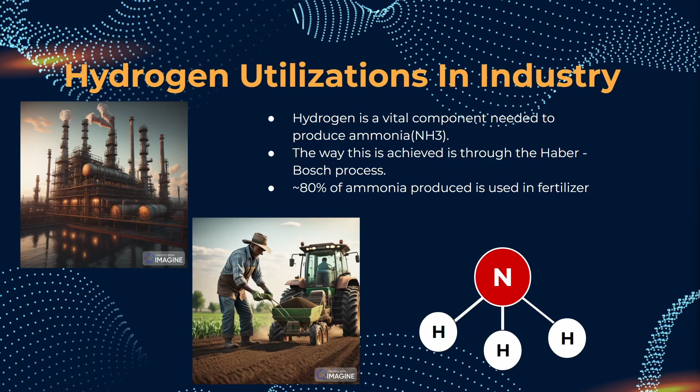While hydrogen as a potential fuel has been known since about the 19th century, in recent years it has resurged in popularity as a potential fuel source of the future. But why use hydrogen as fuel? There's been a move to minimize global carbon emissions, and hydrogen has shown a lot of potential as a carbon-free fuel, more specifically in the transportation industry.

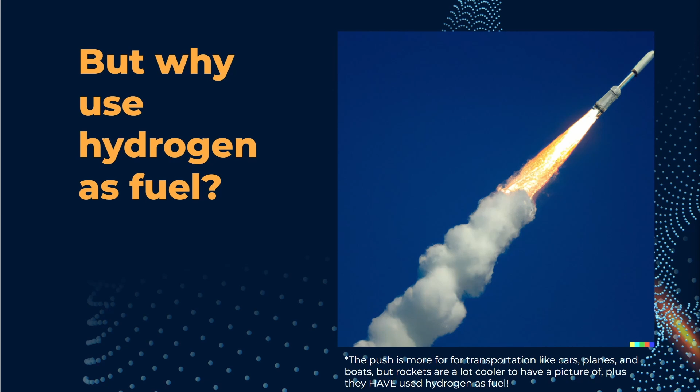Face value, it looks really nice. You take a couple molecules of hydrogen, a molecule of oxygen, make them go boom and bam, you get good old H2O energy. So much nicer than the carbon dioxide and whatever your car's catalytic converter couldn't catch coming out of the tailpipe.

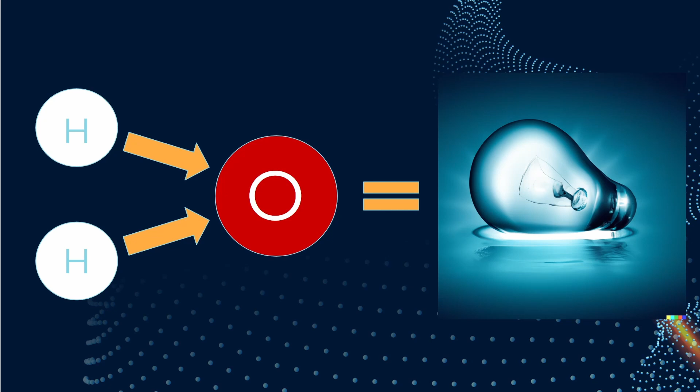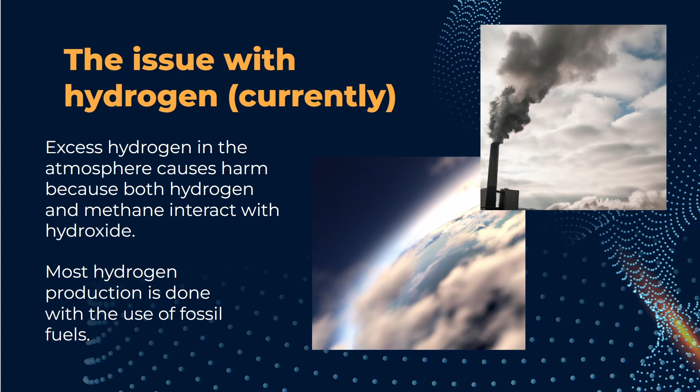Now if you look deeper into it, other issues arise. Excess hydrogen in the atmosphere causes harm because both hydrogen and methane interact with hydroxide. This disrupts the rate of dissipation of methane, a very strong greenhouse gas. This isn't to mention the overwhelming majority of hydrogen production is through fossil fuels, defeating the whole notion of clean energy.

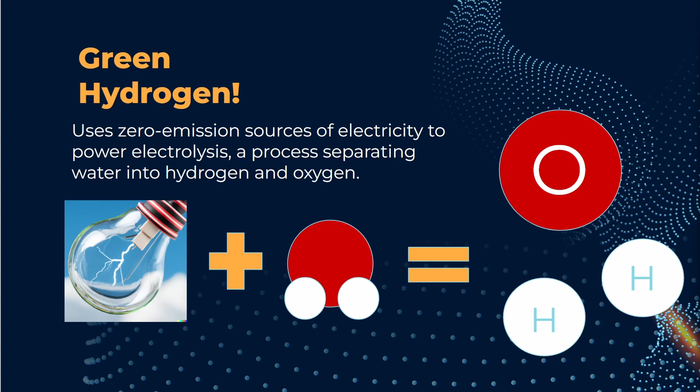For this reason, we will be focusing on green hydrogen, a method which involves using zero-emission sources of electricity, such as wind and solar power, to power electrolysis, a process which separates water molecules into hydrogen and oxygen.

The process of producing hydrogen by electrolysis and burning hydrogen are essentially opposite of each other. When burning hydrogen, it takes a minuscule amount of energy to start combustion at 0.019 millijoules. Since it's such a small number, we'll take this out of consideration, so we can assume that both producing hydrogen and burning it is dealing with the same amount of energy, just reversed.

With this in mind, the energy released by the combustion reaction is 285.8 kilojoules per mole. This is called the higher heating value. We can divide this by the molecular weight of the hydrogen molecule, 2.01568 grams per mole, to find that this is the equivalent of 141.7 megajoules of energy per kilogram of hydrogen.

The lower heating value takes into account the heat energy lost during the reaction. Being at 48.6 kilojoules per mole, we have a remaining 237.2 kilojoules per mole being the maximum amount of electrical energy we can extract from the reaction, assuming there are no heat recovery systems in place. This is the equivalent to about 117.7 megajoules per kilogram, as we use the same calculation as the higher heating value.

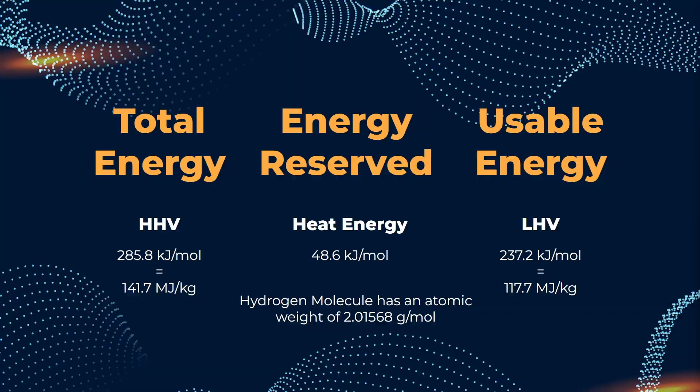Unfortunately, there is no such thing as 100% efficiency. In any source of energy, there are going to be losses from start to finish, with hydrogen being no exception. If we consider the reverse of this process, converting water into hydrogen and oxygen, we will be using the theoretical 117.7 megajoules per kilogram of electrical input to produce the hydrogen.

While there have been advancements seeing upwards of 95% efficiency in the production of hydrogen using electrolysis, current technology commercially in use is expected to have a lower 75% efficiency. To find the energy we need to put into the electrolysis process, we will divide the lower heat value by the commercial efficiency, giving us an input needed at 156.9 megajoules per kilogram of H2.

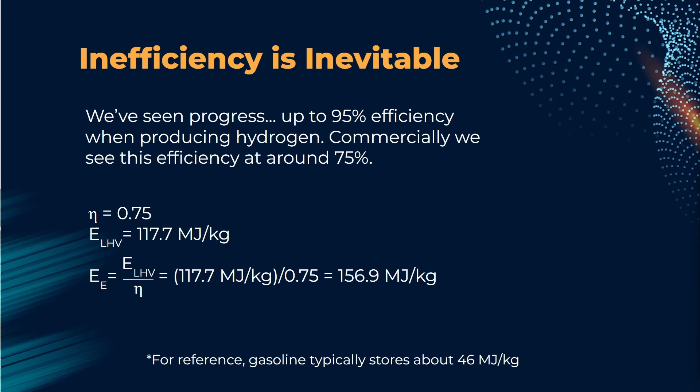While hydrogen has a phenomenal energy density by mass, for comparison, gasoline averages about 46 megajoules per kilogram, it's got one issue. It really likes being a gas, and gases are great at taking up as much space as they can. If hydrogen is at 1 atmosphere of pressure and 0 degrees Celsius, its density sits at about 9 times 10 to the negative fifth kilograms per liter.

If we multiply this by our lower heating value of 117.7 megajoules per kilogram, we get just about 10 kilojoules per liter of energy density by volume, which really sucks when gasoline sits at a much higher 34.6 megajoules per liter. So how do we fix this issue? By increasing the volumetric energy density through compressing and cooling.

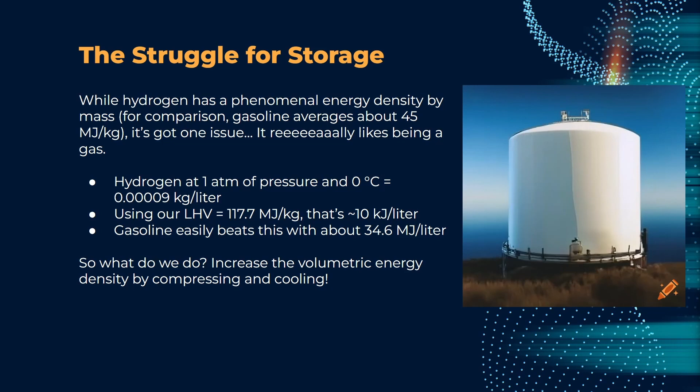There are two main ways of storing hydrogen: in a compressed gaseous state, or as LH2, aka liquid hydrogen. In gas form, it is commonly compressed between 350 bar and 700 bar. The theoretical work required to compress hydrogen to 350 bar is about 3.78 megajoules per kilogram of H2, and at 700 bar, it becomes 4.86 megajoules per kilogram of H2.

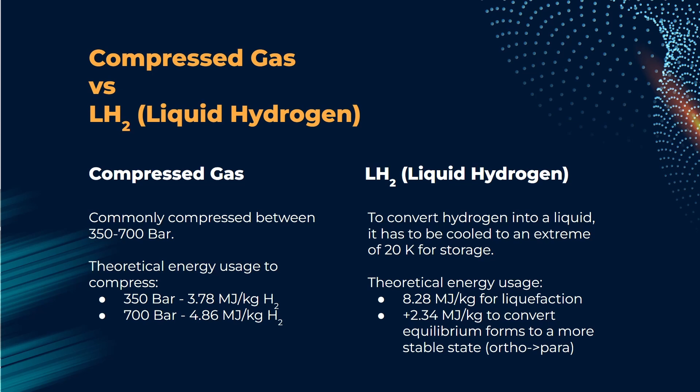In liquid form, more energy is required, as it calls for an extreme temperature of only 20 Kelvin. The theoretical energy needed for liquefaction sits at 8.28 megajoules per kilogram of H2, with an additional 2.34 megajoules per kilogram of H2 needed to convert the hydrogen into a lower energy equilibrium state.

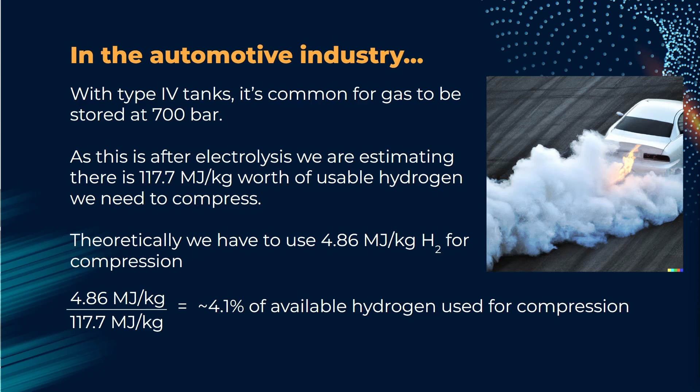As the focus for hydrogen is in the transportation industry, let's look at cars today. Most manufacturers opt for Type 4 hydrogen tanks, storing hydrogen up to 700 bar. As this is after electrolysis, we estimate that there is 117.7 megajoules per kilogram worth of usable hydrogen that we need to compress. Theoretically, we have to use 4.86 megajoules per kilogram of H2 of work to compress to 700 bar. The energy used here is the equivalent of 4.1% of the hydrogen being used for compression.

In practice, efficiency complicates things. The efficiency of a compressor that has to compress H2 to 700 bar is estimated at 49%, as well as an additional 0.72 megajoules per kilogram of H2 needed for cooling to negative 40 degrees Celsius. We can list our knowns here.

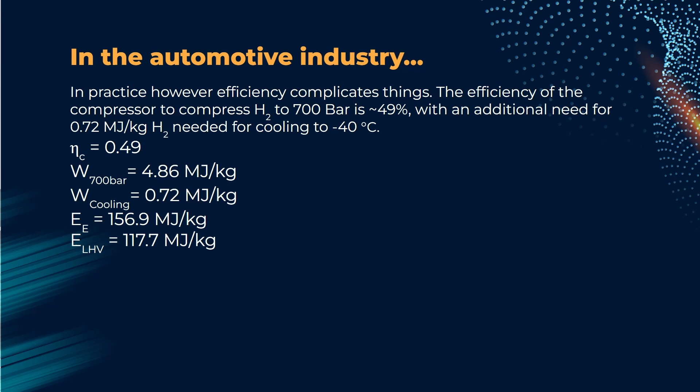To find the work that the compressor does, we divide the theoretical work needed to compress to 700 bar by the efficiency of the compressor, giving us 9.9 megajoules per kilogram of H2 of work needed. Further, we can add the 0.7 megajoules per kilogram needed for cooling to find 10.6 megajoules per kilogram is needed to compress and cool the hydrogen to this state.

To find the efficiency of this process, we divide the 10.6 megajoules per kilogram H2 by the lower heating value, 117.7 megajoules per kilogram, to see that an equivalent of 9% of the H2 present is used in compression. Finally, to find the total amount of energy used so far, we take the energy used in electrolysis and add the energy we need to compress and cool to find that we have used 167.5 megajoules per kilogram of H2.

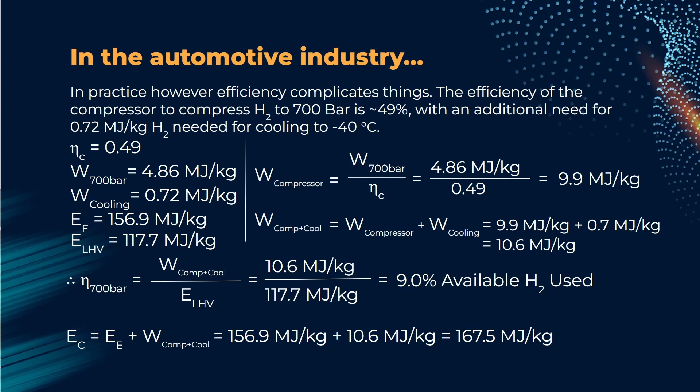Again, as the pressure for hydrogen fuel is seen more so in the transportation industry, it's important to see what type of effective energy usage we may be seeing from the hydrogen tank within the car to its mechanical output. Assumptions we are going to make are as follows. 1. The fuel cell used is a polymer electrolyte membrane, or PEM for short, as it's the industry standard. This fuel cell has a typical efficiency of about 60%.

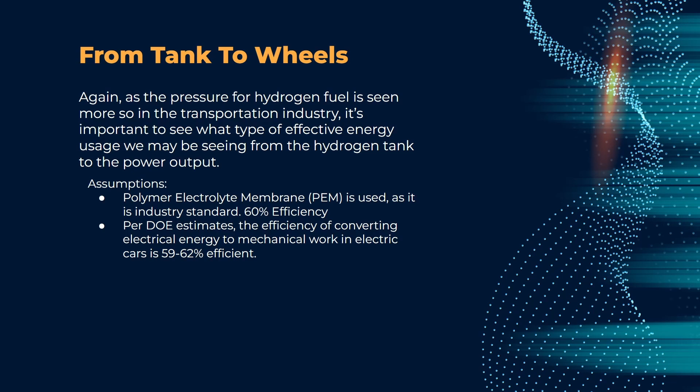And 2. Per Department of Energy estimates, the efficiency of converting electrical energy to mechanical work in electric cars lies at about 59 to 62%. So, we will be taking the median of this and assuming 60.5% efficiency. We can find the overall efficiency of this process by multiplying the two efficiencies given, finding it to be about 36.3% efficient.

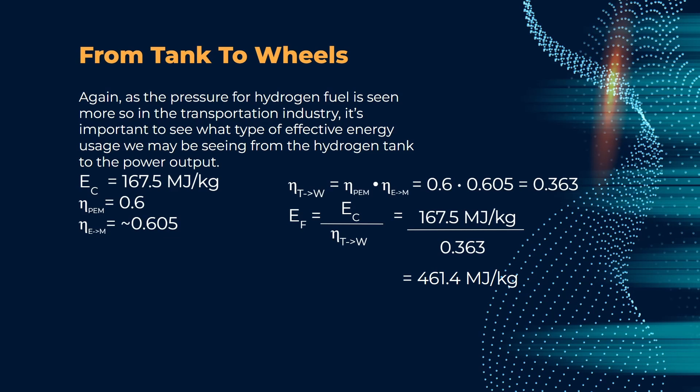Now we can find the total energy required from electrolysis to power output, dividing the total energy thus far by 36.3% efficiency, yielding 461.4 megajoules per kilogram H2 of energy required. Finally, we can approximate the total efficiency of this process by taking the lower heating value and dividing it by the amount of energy required to discover that the amount of energy needed to produce hydrogen is 4 times that of the energy that will be returned.

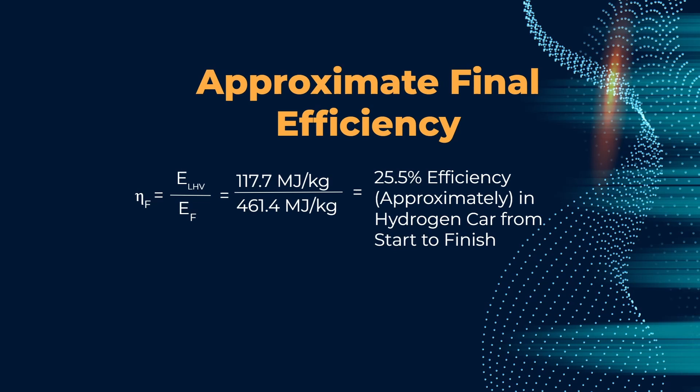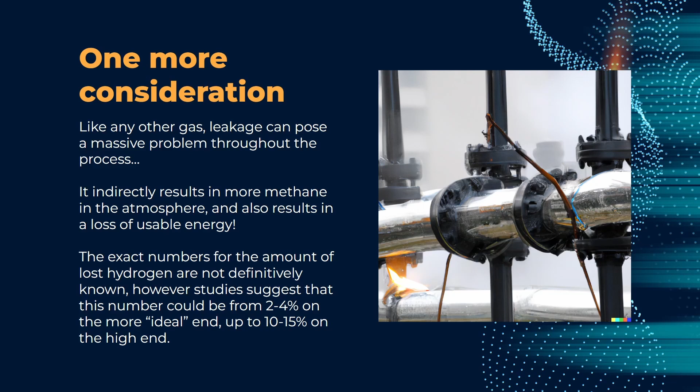Apart from methane and lost energy, a nice quality that hydrogen has is that it has an extremely fast diffusion rate, meaning that the chances of a leak causing similar results as an unfortunate blimp incident are greatly reduced.